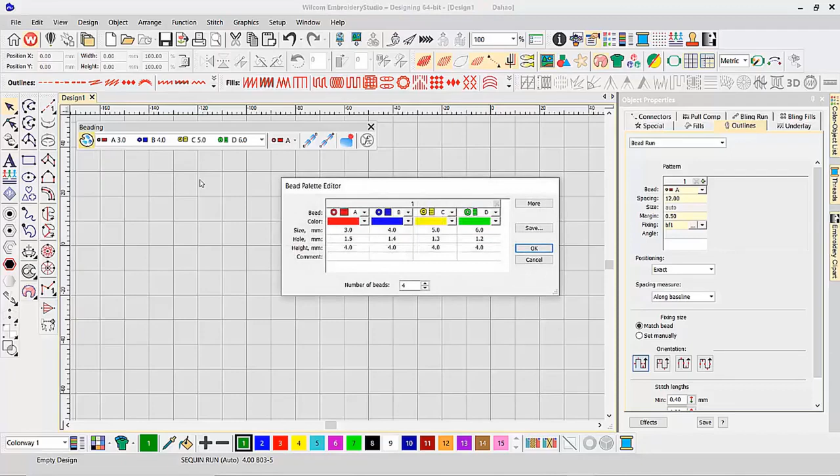Now we're going to talk about the all-new beading in Wilcom Embroidery Studio E4.5. Beading is a brand new decoration method we've introduced to Embroidery Studio to complement our ordinary embroidery plus sequin capability. Very similar to sequin, we've given you the ability to set up a beading palette that lets you define not only the shape of the bead, but also the color and size of the bead.

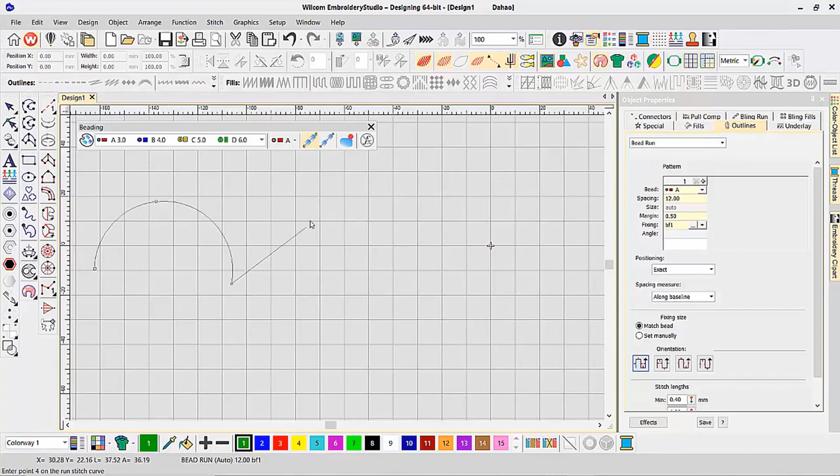As you can see in my bead palette, I have 4 different beads configured for my beading design. We have various methods of using beads in our software. The first is the bead auto run: when selected, I can simply draw a shape on screen and it will create my beading design. In this case, it's placing a bead every 12 millimeters along my design, which is exactly the spacing I have here. Or I can change it down to 4, and now it's specifying it every 4 millimeters. That's the beading auto run.

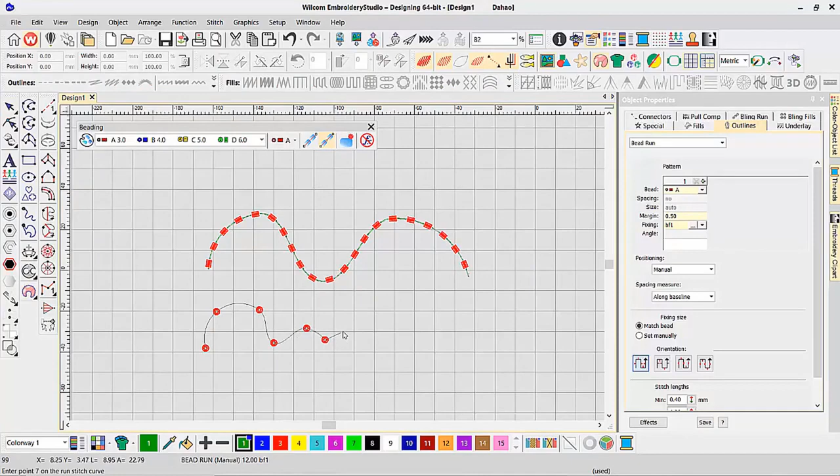And of course, we have the bead manual run, which will only place a bead everywhere that I click my mouse. Along each of those clicks, it has placed an individual bead.

Now let's go back to my first beading object, this one that I've created here. With this beading object, I have a laydown bead that is sewing along and dropping a bead along that design line - dropping a bead, dropping a bead, dropping a bead, and sewing it down along my path. If I select that bead object, I can change the spacing, make it 3 millimeters for example. I even have a choice of the type of bead - either bead A, B, C, or the D style bead, the exact same beads I've configured inside my bead palette. Let's take this back to A.

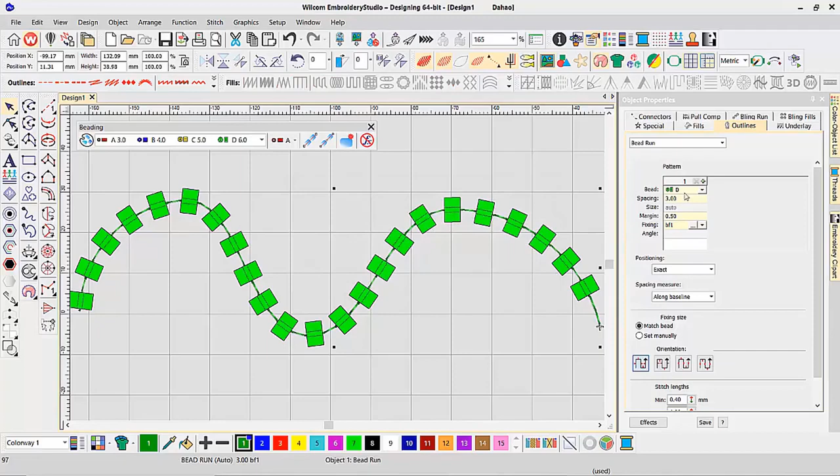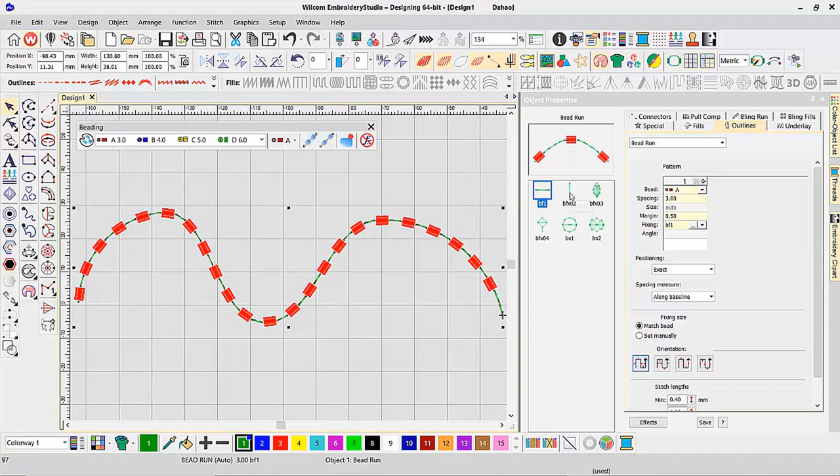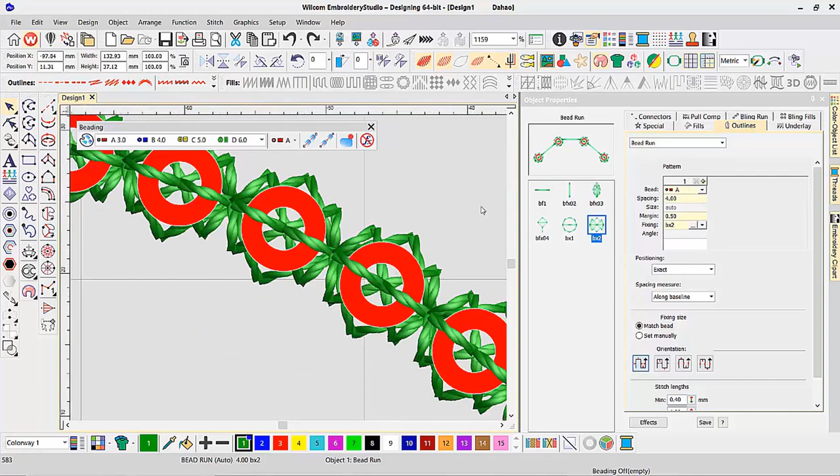In addition to this laydown bead fixing method that sews along the bead line, I can select from a collection of different fix down stitches built into the software. Here we have the classic laydown bead, or the second bead fixing stitch, and I can increase my width a little to space that out. Or I have a decorative fixing stitch, such as this method here, which creates a very decorative pattern along the edge of my bead. Or this method, or this method, or this method. Each of these fixing stitches is a decorative style of bead fixing - not just standard plain flat, but very decorative fixing methods to create really decorative designs on your machine.

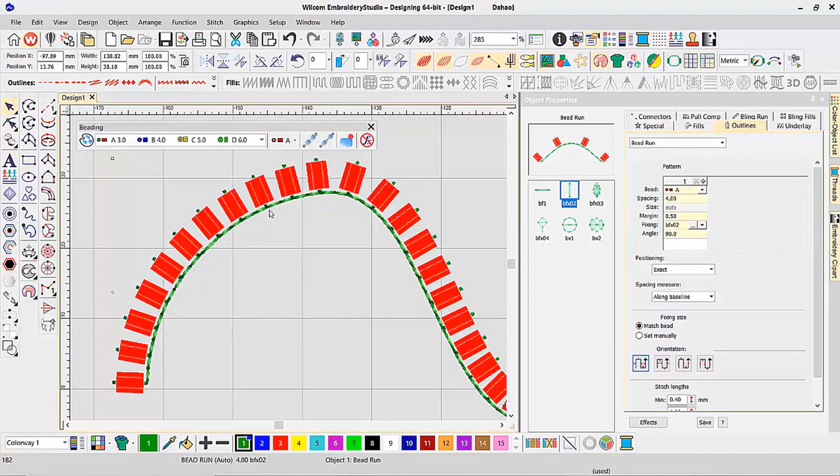Now if we look at this particular bead fixing pattern, we can see this spacing is set to 4 millimeters, so every 4 millimeters we're placing down a new bead evenly along the line. That comes to be a bit of a problem though. When we come around the corner, this part looks okay - it's a nice even spacing. But as we come down here and turn into the corner, we can see that 4 mil spacing is creating a bunched set of beads running into each other. So we have some settings to control that.

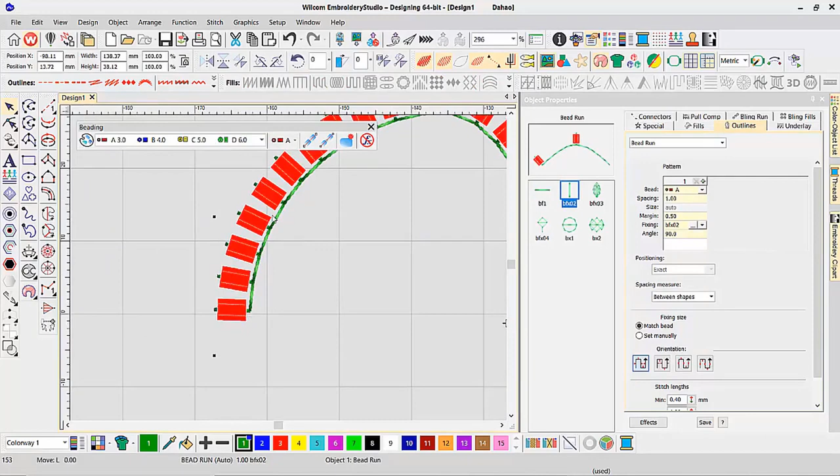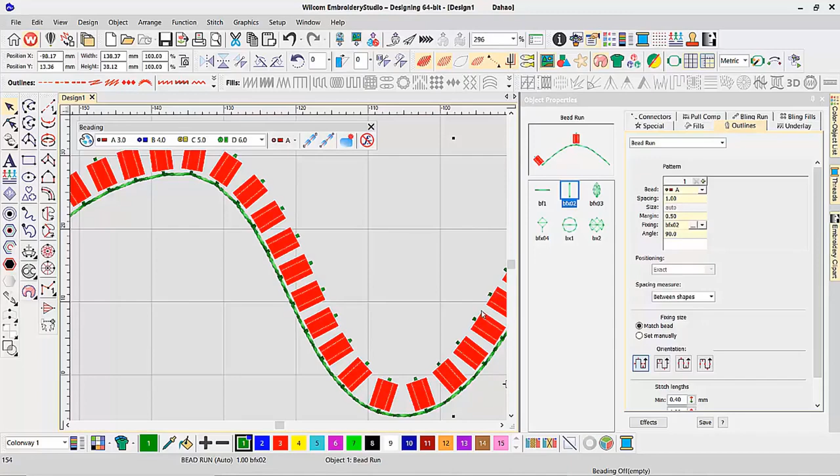At the moment, I have my spacing set to be along the baseline, meaning every 4 millimeters along the baseline it drops a single bead. If I change this to be between the shape and set my spacing to 1 millimeter between each shape, it now evenly spaces my beads - on the closed corner, each bead is 1 millimeter spacing away from each other. And when we come around the corner, at this point it is still 1 millimeter along here, and then on the inner curve it jumps over to here, and now this spacing is evenly 1 mm spacing. Then on the opposite curve it flips back and goes 1 mm, 1 mm, 1 mm along the entire line, giving you a clean visual representation of that spacing.

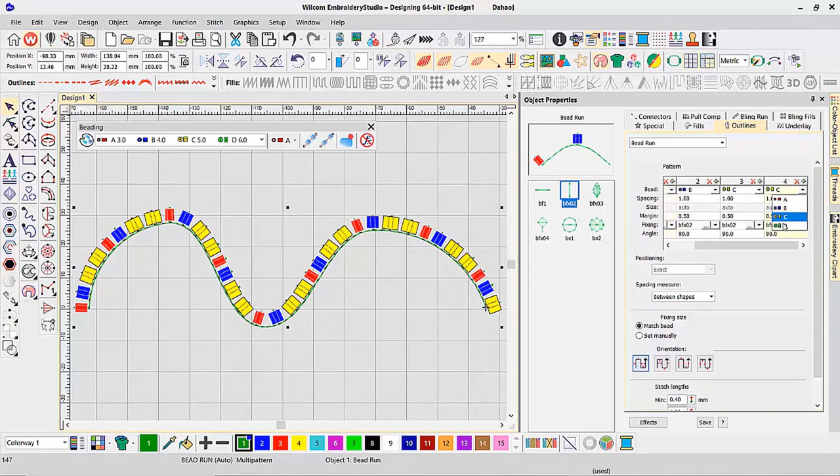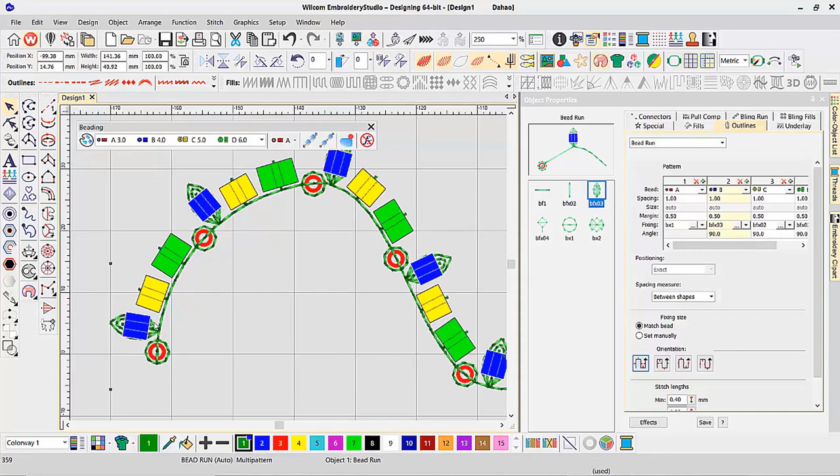Now, in addition to this single bead along my pattern, I can add a second bead and make it B, a third bead and make it C, and a fourth bead and make it D. Not only does each bead have to be different, but each bead can have a different fixing stitch. The first bead can be a round fixing stitch, the second could be the pattern bead, and the third fixing stitch could be number 4, standing out on the side. So every single bead along my pattern can have a unique fixing stitch, really opening up the creative capabilities of our brand new beading feature.

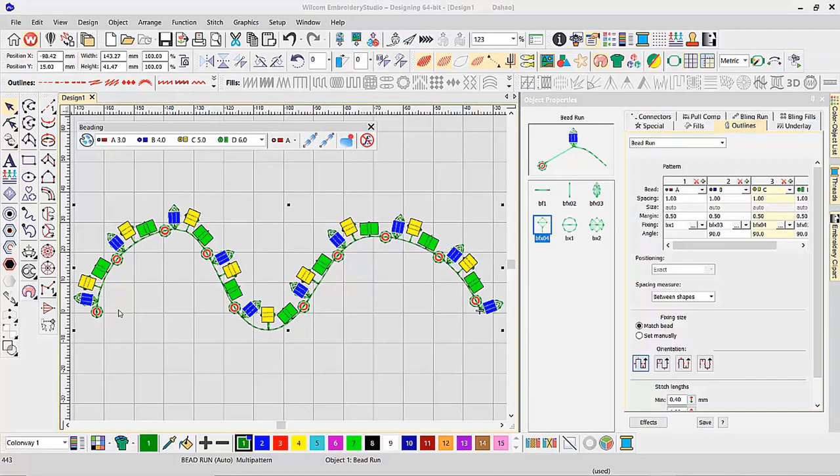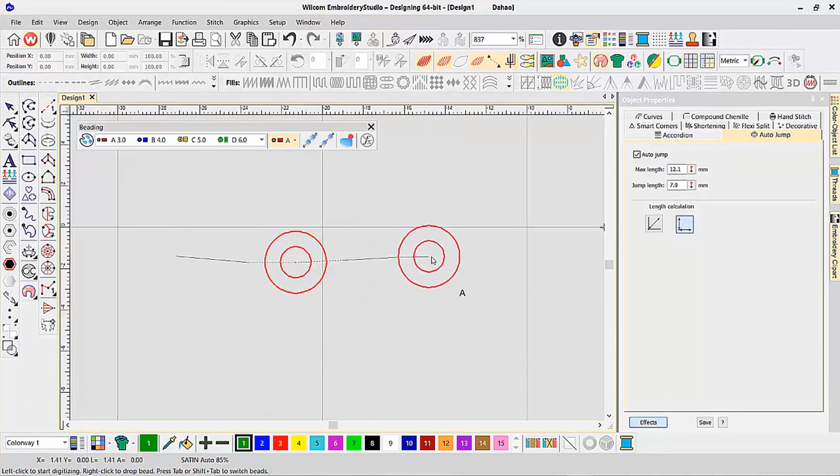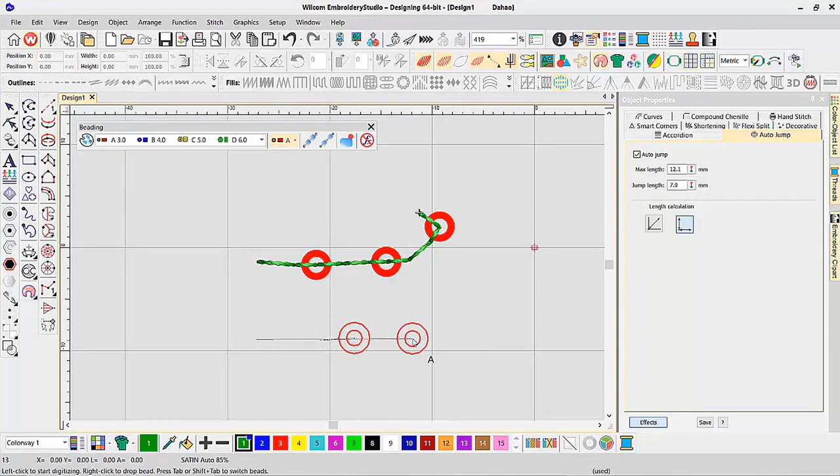Now, in addition to the automatic beading run you've seen me do here, I can also manually create beading designs using the manual bead tool. With the manual bead tool, you can digitize your designs just like you would on screen manually - creating a stitch, dropping a bead, stitch, stitch, drop bead, stitch, stitch, drop bead, and stitch. As you go along, it will create that beading design for you. You can even force it to do a laydown bead by sewing along, sewing, drop the bead, sew back, and continue - now it creates a laydown bead.

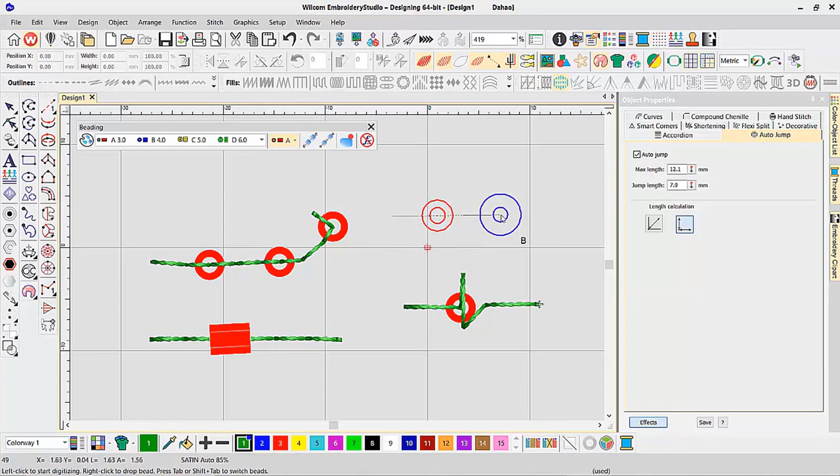So you're free to create any type of bead design you want. So go back and continue, and it will create all the designs and styles you want, as if you're designing it manually on screen using the bead tool. Also while you digitize along, you can change what bead you want by pressing the tab key and drop bead. Again, it will create each one of those designs and manually drop the bead as you want it to do on screen.

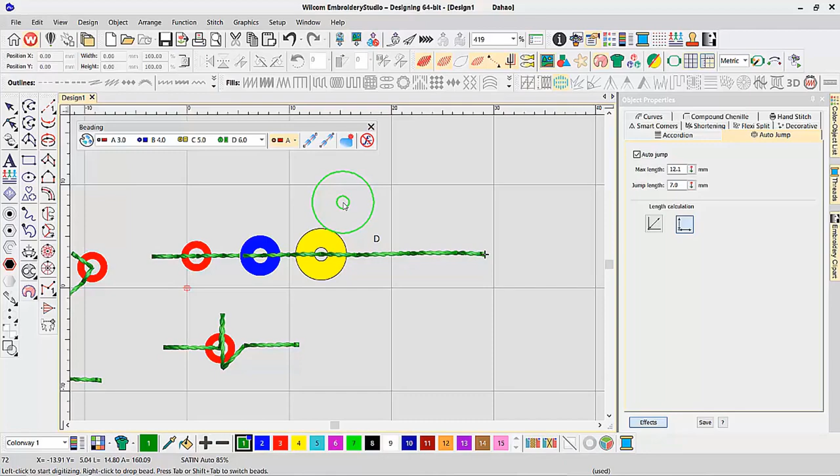Now, the beading feature is available as an add-on element for your Embroidery Studio E4.5 and can be used in addition to your standard embroidery and sequin capabilities.